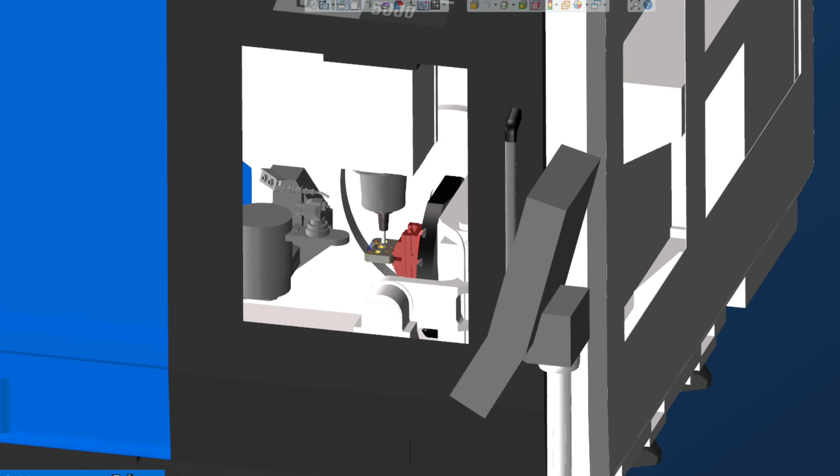In this Tech Tip, we're going to talk about something called combined shapes. This allows us to add, subtract, find the intersection of geometries, whether you read them in or create them inside of GibbsCAM. It also allows you to trim lines inside, outside of your geometry. With that, let us begin.

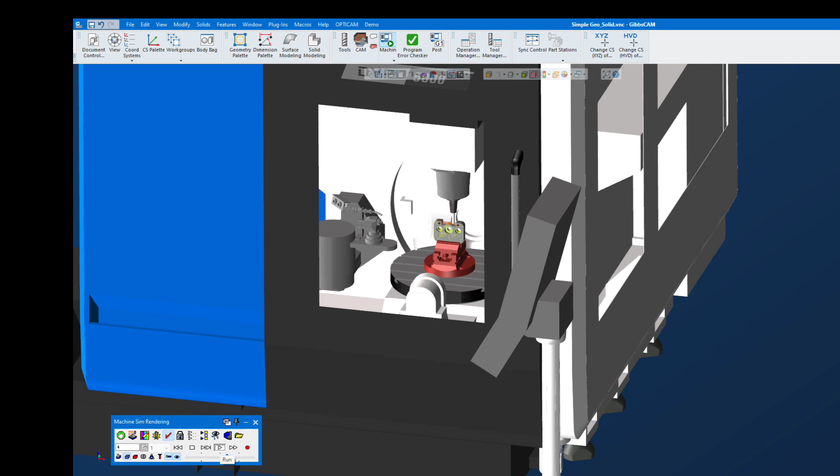What I want to be able to do is put this together into a part, okay? I want to take this rectangle here and subtract it from the rectangle with the radiuses. And then once I do that, I want to be able to add the circle to that resultant geometry. Now, what I really don't want to do is trim and untrim and do all this stuff and reconnect everything. I really don't want to do that.

So the first function we're going to show you is called combined shapes. We're going to go to the geometry palette, go to our shapes, and at the end here, you're going to see combined shapes. This allows me to add, subtract, or find the intersection of geometry. I can trim geometry to another shape for the inside, for example, which we'll show you. I can trim geometry to the outside of a shape or on both sides of the shape. Okay, and we'll show you that really quick.

So the first thing I want to do is subtract this rectangle from the rectangle with the radiuses. So I'm going to select what I'd like to keep, select what I'm going to subtract, go up here to my subtract, and now we have basically cut out that slot in the geometry. No trimming, no adding extra geometry, no doing anything.

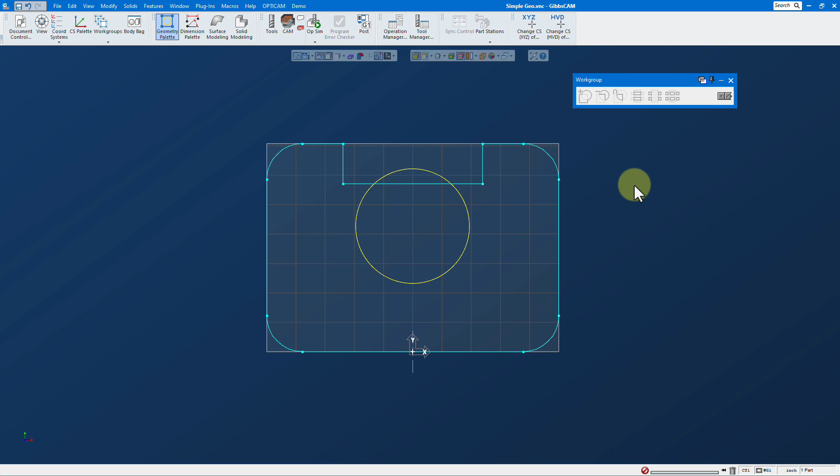Next thing I want to do is add the circle. So let's double click here, the circle, and we'll say add. And just like that, we've created our shape out of 3 pieces of geometry. Now you could use this if you received some geometry from someone and you need to add something to it, you can do the same thing. You can draw some geometry and add it very, very quickly.

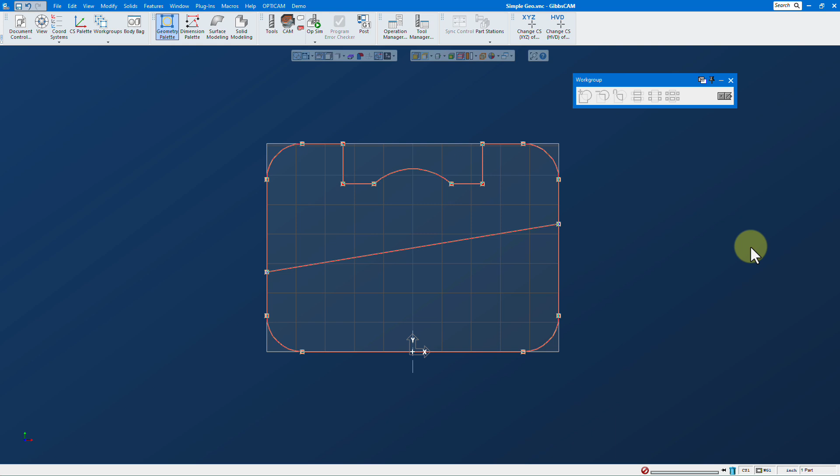I'm just going to sketch a line here. And we're going to go back to our shapes. And what I want to do is I want to trim the inside of this line to this shape. Okay? So we'll pick the shape, we'll pick the line, and I will say trim in. So it trims the geometry to the inside of that shape. This one says trim out, so it trims out the center and leaves the outsides.

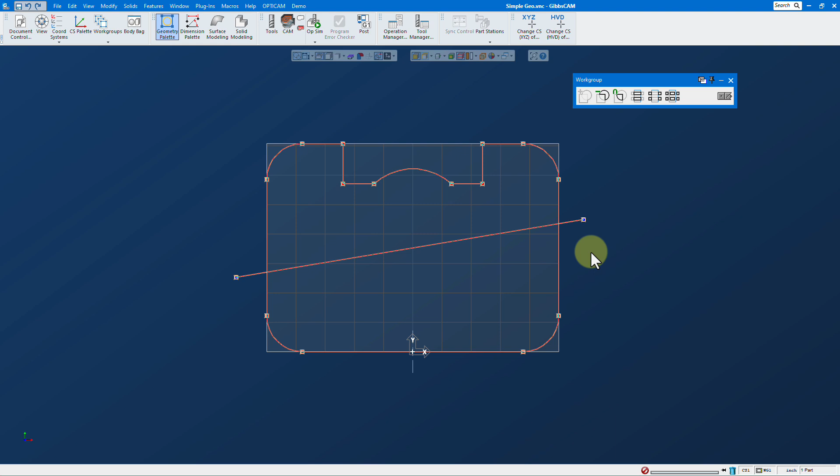The last function here says slice, and what this does is it gives us all 3 pieces. So it basically slices and gives you the 3 pieces of geometry that you might want. Okay? So again, it's really nice functionality, quick, easy, no trimming, untrimming, manipulating of the points, none of that stuff. 1, 2, 3, and it's done.